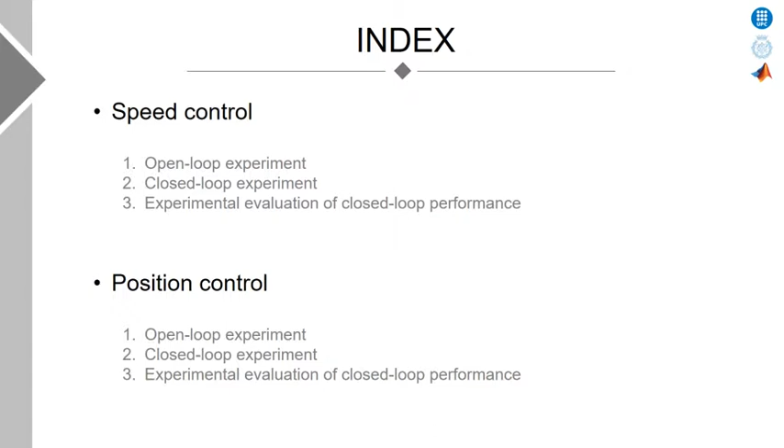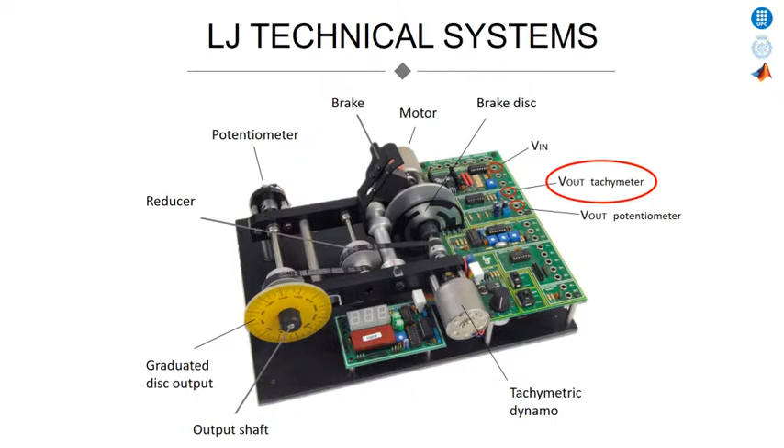Depending on the output we take, we will obtain different mathematical models, but the form of the response will be the same. What I mean by this is that the output of the motor can be the terminal voltage of the tachometer dynamo, the motor speed in radians per second, relating it with the tachometer constant, or even the speed in revolutions per minute, relating the voltage with the speed with the help of the display that the engine offers. In this case, the response of the motor will be analyzed taking the terminal voltage as output.

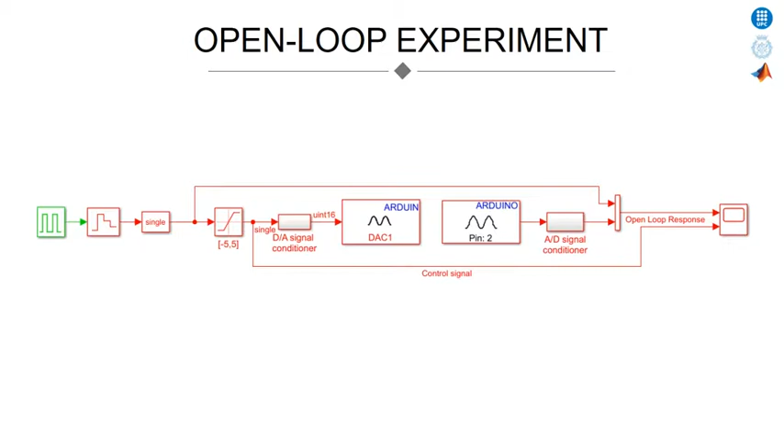In this video we can analyze how the motor is able to turn in both directions depending on the input voltage. We can also make it stop when no input is applied. But what happens when the engine is moving and we apply or remove the brake? We can see that the velocity of the motor is reduced when applying it, and vice versa, when we remove the brake, the output increases.

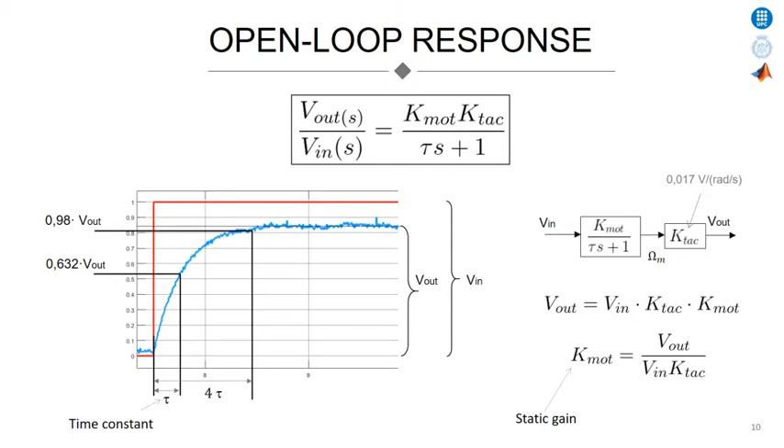As we can see, the output resembles the response of a first-order system, so, in order to obtain its transfer function, the following mathematical formulas must be applied. The model consists of two parameters, the time constant and the static gain. The time constant is the time for the system step response to reach 63% of its final value, and the static gain is the ratio of the output and the input under steady-state conditions. In this way, for this system, the following transfer function is obtained.

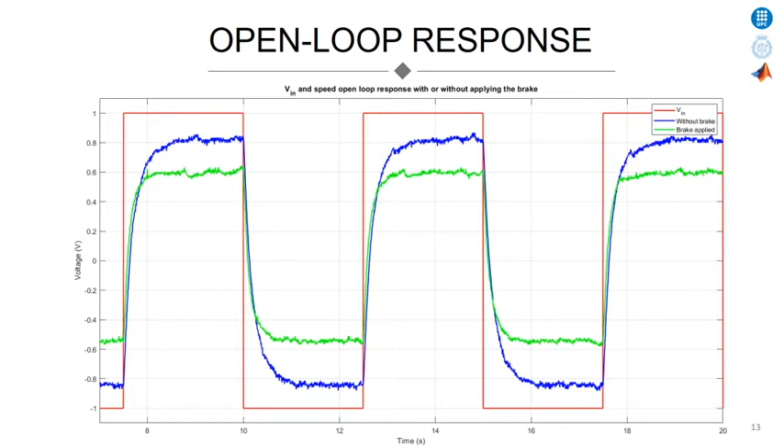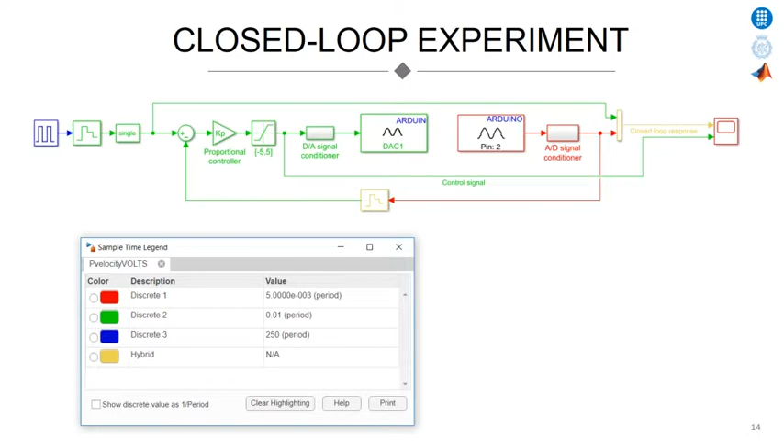Once the engine transfer function has been obtained, the tachometer signal has been fed back and a proportional controller has been created. For this experiment, the following Simulink model has been built. In the following video we can analyze the behavior of the engine. In this video, the Simulink model shown before has been implemented with three different gains, Kp equal to 1, 2, and 5. As we can see, the higher the gain, the faster the response and the smaller the static error.

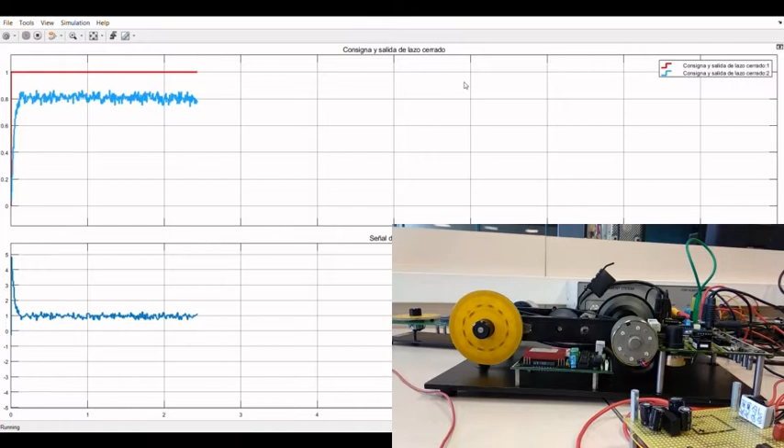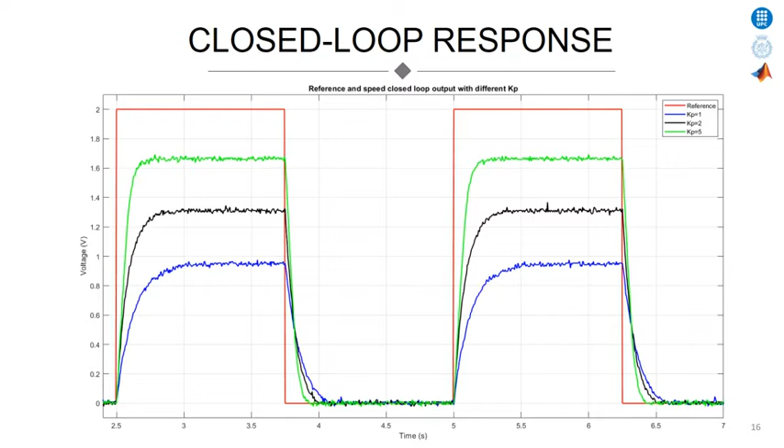In this plot, the concepts explained before can be seen more easily. Finally, the accuracy and stability of the system have been evaluated with different sampling periods. As can be seen in the image, the loop is digitized with sampling periods of Ts, but the graphing is carried out at the maximum possible speed, at 5 milliseconds. The sampling periods of the plant are dependent on the graphing period, since they will be larger and multiples of it.

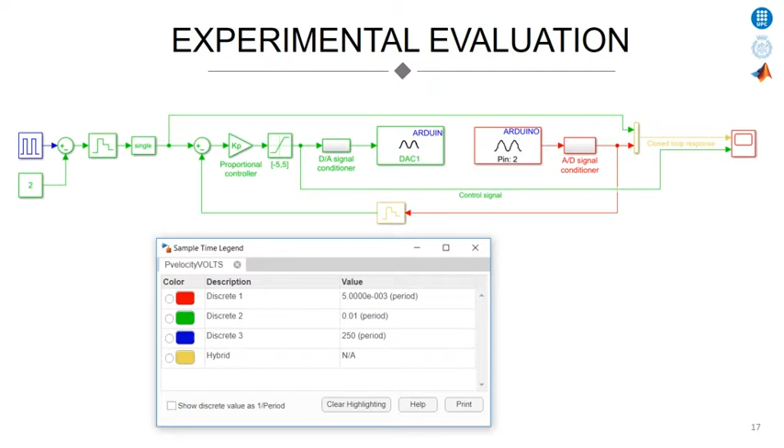To analyze from which Ts we will have oscillations, we must obtain the digital transfer function of the closed-loop system. For this, first, the open-loop digital transfer function will be calculated using a zero-order holder. Once the expression of the pole is obtained, we will equal it to 0, since the system will start to oscillate at that exact point. In this case, evaluating the equation with our parameters, we obtain that the system will begin to oscillate at 0.2 seconds of sampling time.

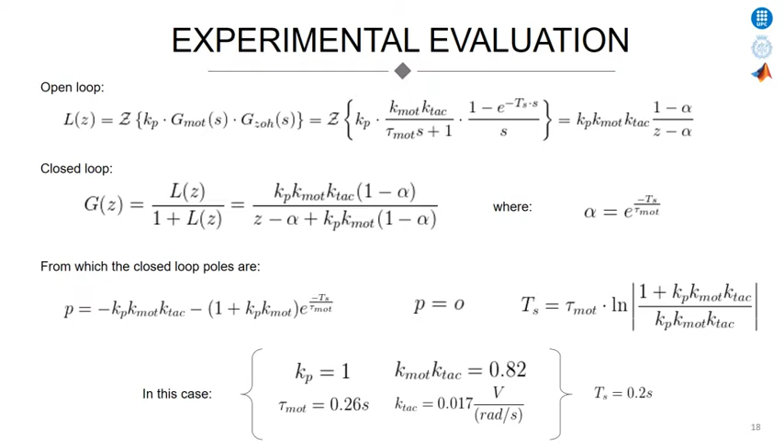In this case, theoretically there should be oscillations from sampling periods of 0.2 seconds, and as can be seen in the image, the response of the system with this sampling period, the response in magenta color, has an overshoot, and with greater sampling times, the output is even more oscillating.

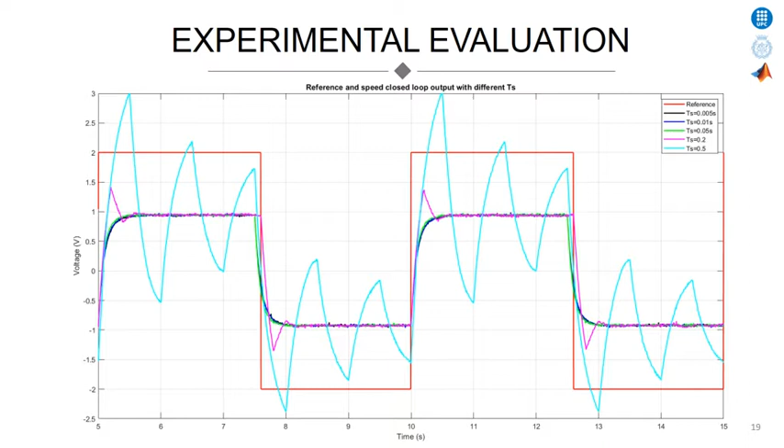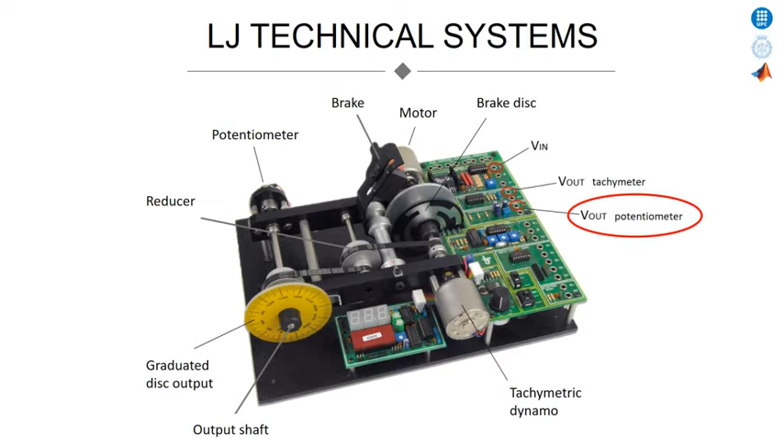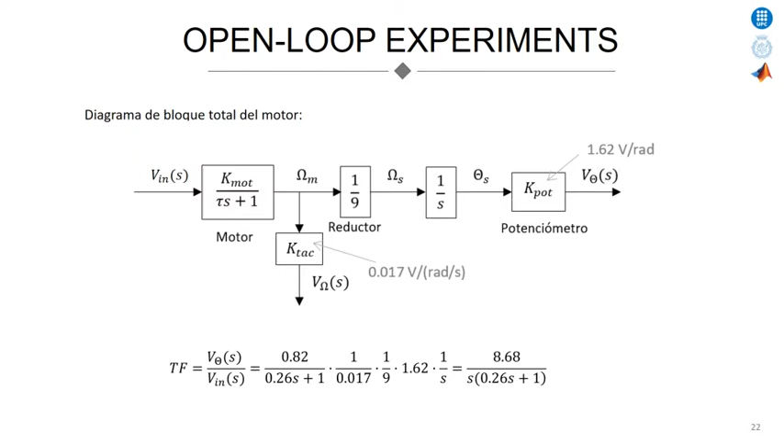In this case, for the position control experiments we need the potentiometer's signal. This pin is also on the right side of the plant, as can be seen in the figure. As previously mentioned, the same experiments have been carried out for the position case. To do this, we have obtained a new mathematical model that represents the open-loop dynamics of position. This has been achieved from the mathematical model obtained in the previous experiment, where a reducer, an integrator, and the potentiometer constant have been added, in order to relate the output voltage with the input voltage.

In this video we can analyze how the response of the potentiometer is a periodic signal with a saw waveform. Depending on the turning direction, the saw waveform varies, being symmetrical with respect to the turning direction.

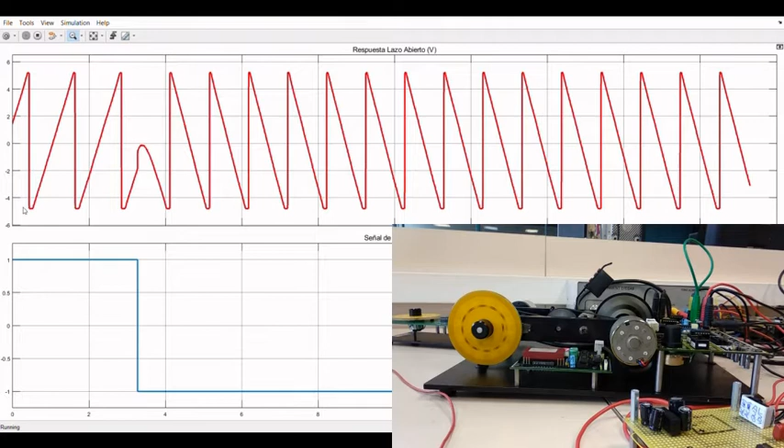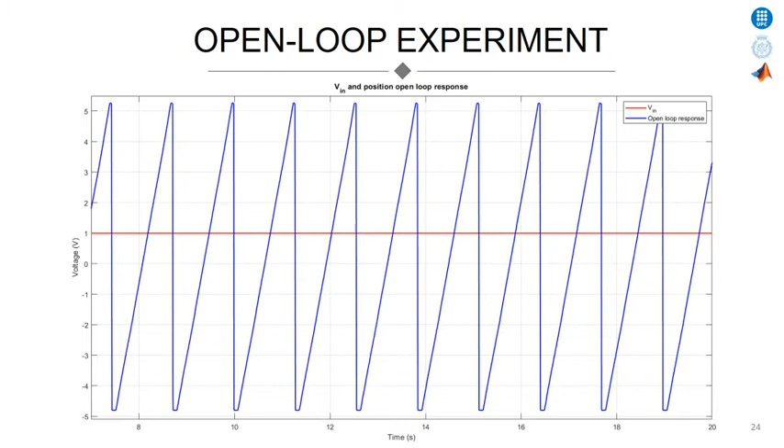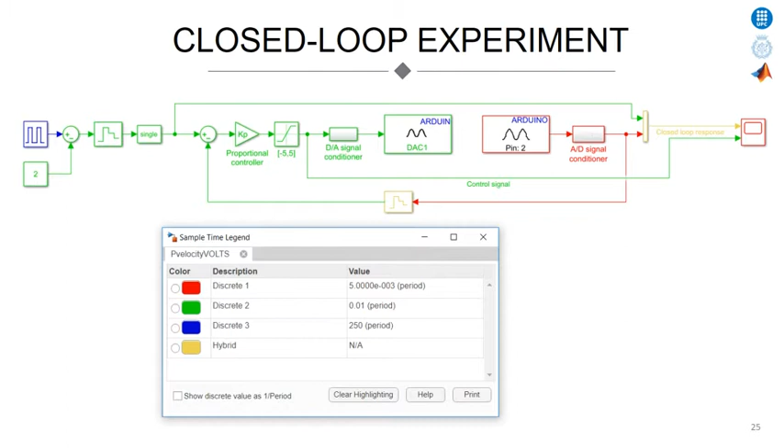As previously mentioned, the response of the plant in open loop is a periodic signal with a saw waveform, since the plant is type 1. So, to step type inputs we will obtain a ramp type signal. On the other hand, the periodicity occurs for each spin of the potentiometer axis. As has been done in the case of the speed control, a proportional controller has been designed. The Simulink model for the closed-loop system is the one shown.

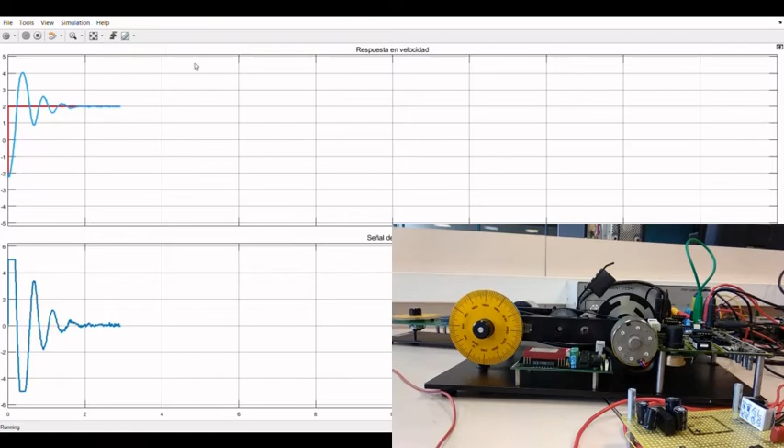In this case, since the motor is of type 1, the stationary error will be 0, but the overshoot and settling time will vary depending on the gain of the controller. The higher the Kp, the greater the overshoot and the longer the settling time, as can be seen in the figure.

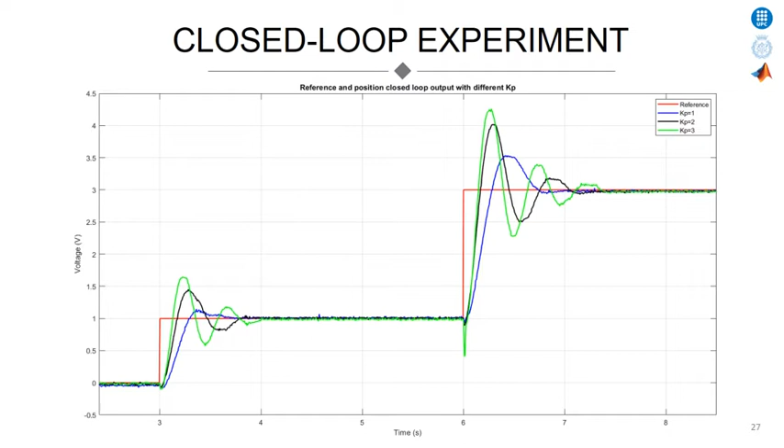Finally, the accuracy and stability of the system have been analyzed for different sampling periods. In this case, the graphing will be carried out at 5 milliseconds and the sampling periods of the plant will be bigger and multiples of it. For this experiment the following Simulink model has been implemented.

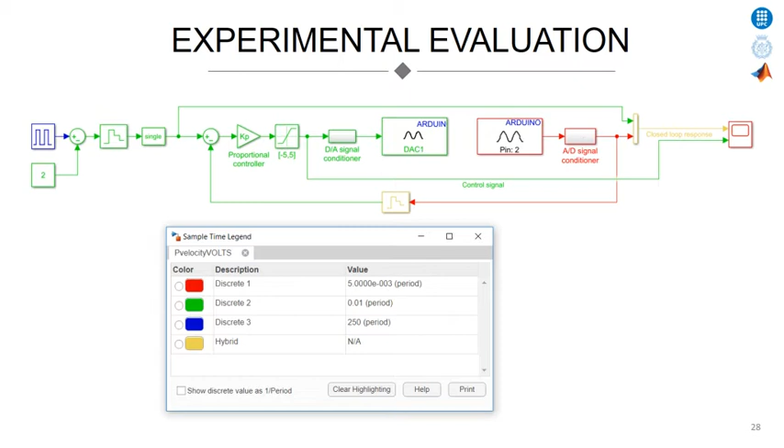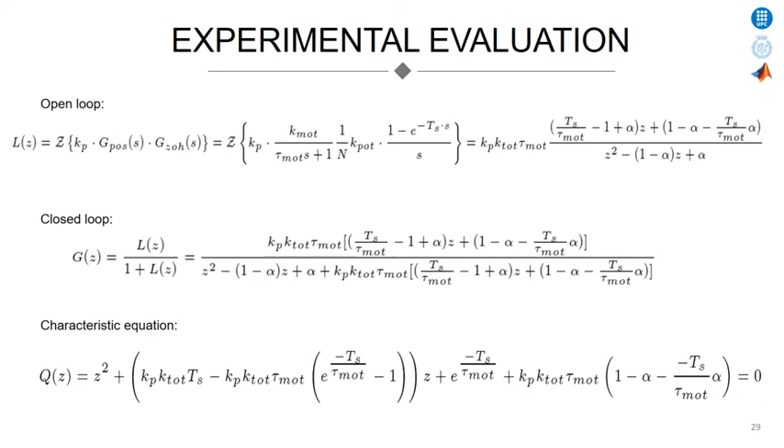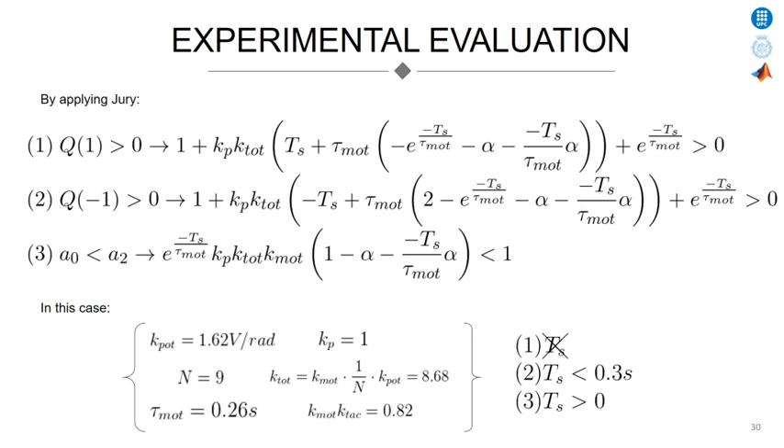In this case also, to analyze from what value the system will become unstable, as we have done previously, the plant has been digitized with the help of a zero-order hold and the closed-loop digital model has been obtained. In this case, we will evaluate the stability by applying Jury's stability criterion to the denominator. From Jury's criterion, we obtain that the range of the sampling period for the system to be stable is from 0 to 0.3 seconds. From this point on, the system will become unstable. As can be seen, at sampling periods of 0.3 seconds the system becomes unstable, which is the value obtained by doing the theoretical calculations.